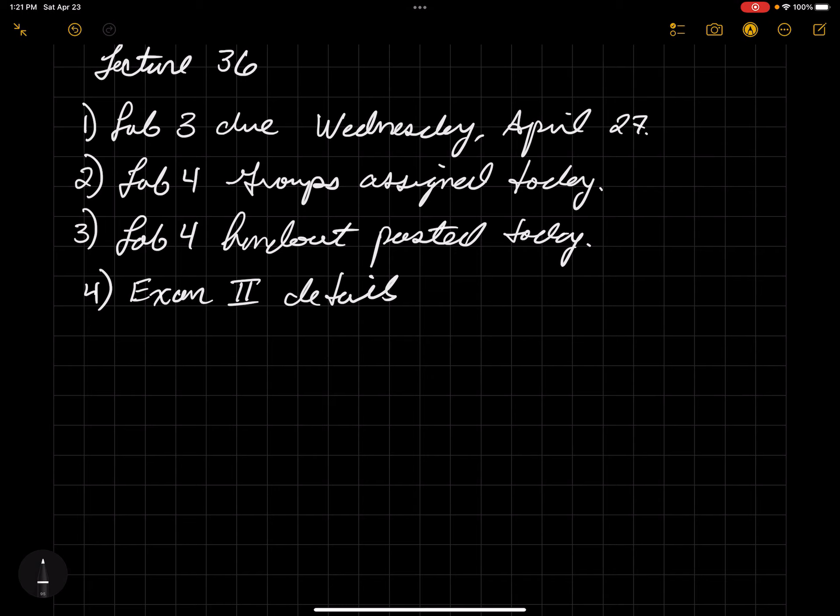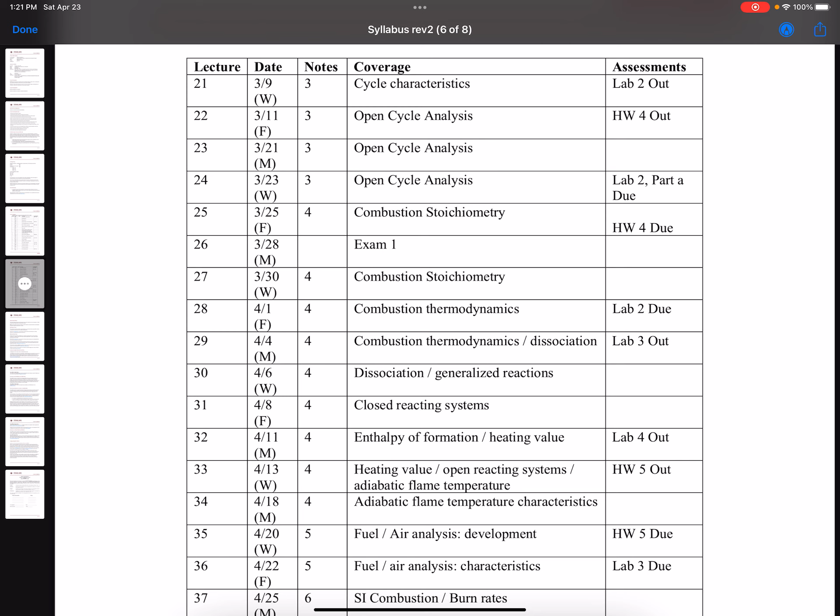I also want to take a little bit of time to talk about the Exam 2 details. We've already talked about this a little bit in one of the lectures this past week, but just to give you a review of where we are with the rest of the semester. So we're essentially right here with lecture number 36.

Lab 3 has been pushed to a due date of Wednesday, April 27th, and that's been updated on the calendar. We're about a lecture behind schedule, where we'll be wrapping up the flame temperature characteristics today. We'll be starting and probably finishing the fuel air cycle analysis development today, and then probably covering the fuel air cycle analysis characteristics on Monday. This will then allow you to do all of Lab 3 - once we get through the fuel air cycle analysis characteristics, you'll be able to do objective number 2 of Lab number 3.

On Wednesday, we'll probably start our discussion about SI combustion and burn rates. This is what you will need to do for Lab number 4, as well as Exam 2. Exam 2 is basically covering much of the material we'll talk about in those 3 lectures about SI combustion and burn rates, plus some other cumulative type things we've discussed throughout the semester. I wouldn't be surprised if you're asked a question about power generation, or about nitric oxide formation, like what we'll be talking about here in just a minute as related to Lab number 3, or discussing things related to efficiency and such.

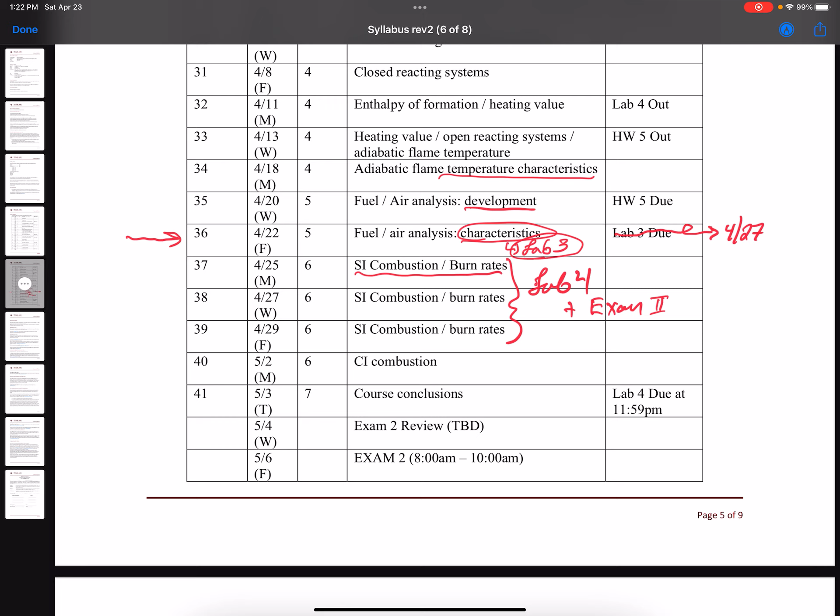Related to that, Exam 2 is scheduled for Friday, May 6th, and it's scheduled for 8 a.m. to 10 a.m. That's our scheduled final exam time slot.

As I've already mentioned in class, we'll be making Exam number 2 a take-home exam. I haven't quite yet decided on all the details, but it'll probably be released on Thursday, May 5th at noon, and then you'll have 24 hours to complete it, so it'll probably be due Friday, May 6th also at noon. Again, it'll only take you 2 hours to write it, but you have the 24 hours to work around schedules and other things of that nature.

These are still tentative at this point. This could change, but that's currently what I'm thinking.

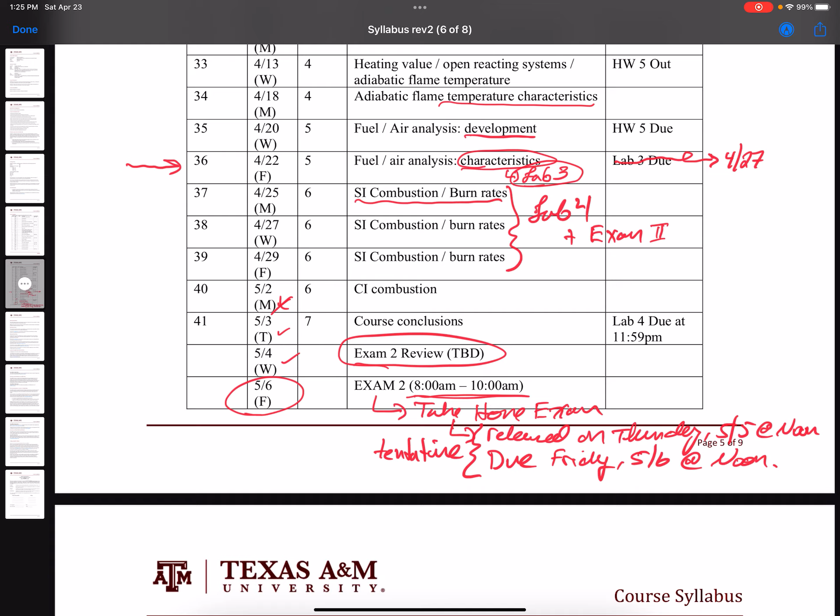Okay, so let's continue on with the lecture material and wrap up our discussion about adiabatic flame temperature. If you remember, when we last had class in person, we generated a figure that looks something like this, where we have adiabatic flame temperature as a function of phi, the equivalence ratio, on the x-axis.

So this is our equivalence ratio. As you can see, generally speaking, our adiabatic flame temperature tends to increase on the lean side, reaches a peak, and then begins to decrease as we go to a richer mixture. I won't go over those details since we covered that in the previous lecture. We also talked about how increasing the exhaust gas recirculation level, the EGR level, will cause a lowering of the flame temperature.

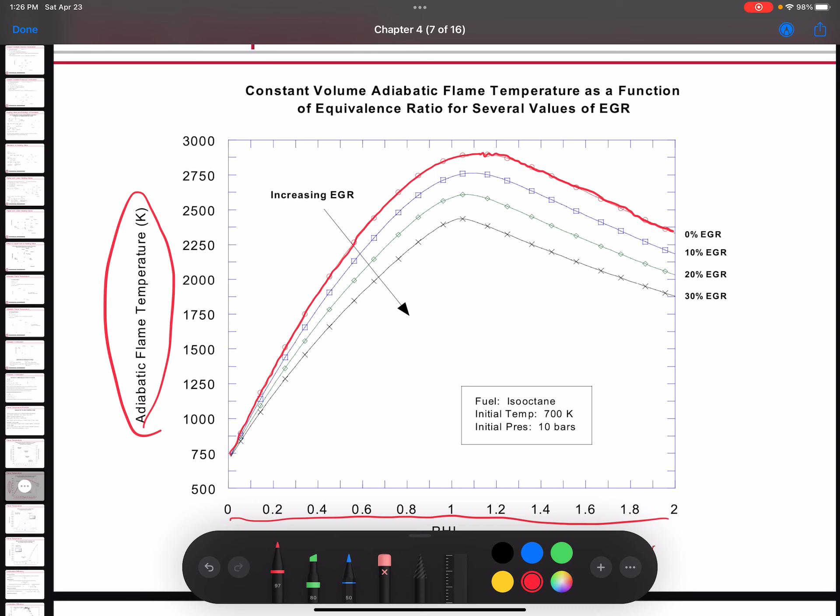If you remember, we discussed that the reason for this lowering of flame temperature as EGR increases is that we're essentially diluting the mixture with mass that has to be raised to the reaction temperature, but doesn't actually provide its own energy to the reaction. So it's conceptually similar to leaning the mixture with diluted air. As you go to lean equivalence ratios, increasing the EGR level is more or less doing the same thing. But the difference is that rather than using pure air to dilute your mixture at lean equivalence ratios, you're using exhaust gases.

So you have increased concentrations of CO2 and water in your mixture, and as a result, that causes your peak flame temperature to shift closer to stoichiometric. If you look at where that peak flame temperature occurs, you'll notice the peak is shifting closer and closer to the phi equal to 1 equivalence ratio, stoichiometric conditions.

One of the chief reasons why that happens is because, as we raise the equivalence ratio up to stoichiometric conditions, the adiabatic flame temperature continues to increase since we're decreasing the concentration of O2 in our products of combustion. As that O2 concentration decreases, the mixture reaches a higher temperature because there's less mass there to absorb the energy.

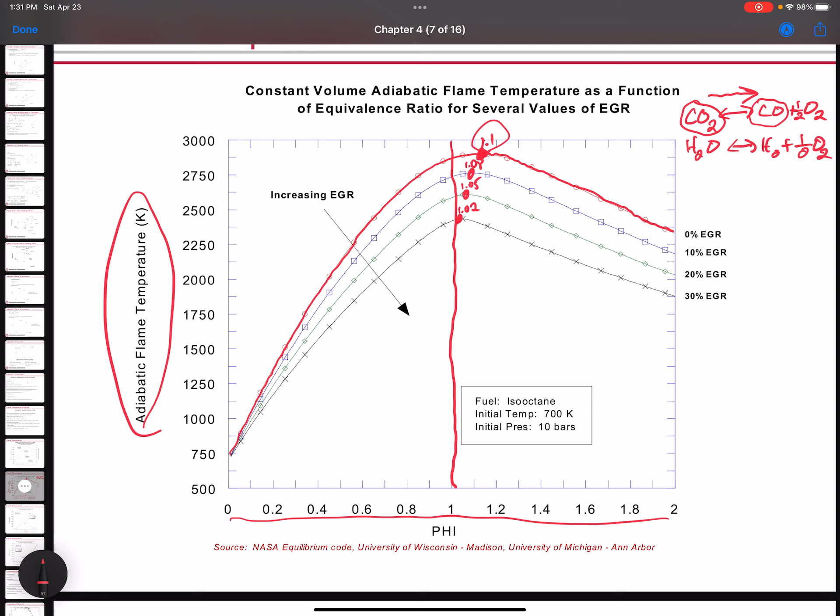As we go to higher and higher flame temperatures, this dissociation reaction is pushed in the forward direction. As you go to higher flame temperatures, your carbon monoxide concentration increases, as well as your oxygen concentration. CO absorbs less energy than CO2 does — in other words, CO2, being a more complex molecule, is able to absorb more energy within the molecule itself than CO or oxygen is able to absorb. Likewise, water is a complex molecule, and as you raise its temperature, the water dissociates into H2 and O2.

As we go to higher and higher flame temperatures, as the equivalence ratio increases, there's a dissociation of H2O into H2 and oxygen, and these two species hold less energy at a given temperature than water does. Because these molecules hold less energy, that energy has to go somewhere, so it raises the kinetic energy of the whole mixture, which raises the temperature of the mixture.

This peak flame temperature occurs essentially where there's a balance between the dissociation of CO2 and water into their component species of CO, hydrogen, and oxygen, and the addition of higher amounts of mass within the mixture. So eventually the temperature begins to decrease as there's an overabundance of, say, CO or hydrogen atoms within the products of combustion.

So what causes this shift as EGR level increases is the dissociation, right? The extent of dissociation of CO2 and H2O into component species - that would be things like CO and H2 - decreases as temperature decreases. In other words, equilibrium is being shifted toward the reactants.

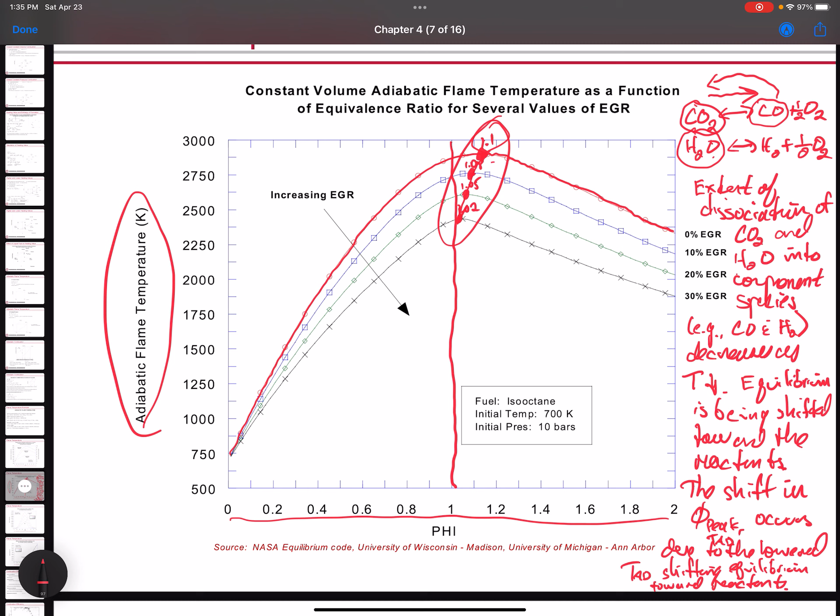Now what I'm going to do is jump ahead two slides and go to the relationship of mole fraction of carbon monoxide as a function of equivalence ratio. As you'll notice, and as might be expected, as we increase our equivalence ratio starting from a lean condition, say for a 0% EGR case, the carbon monoxide concentration begins to increase, rather drastically as we go to richer and richer conditions.

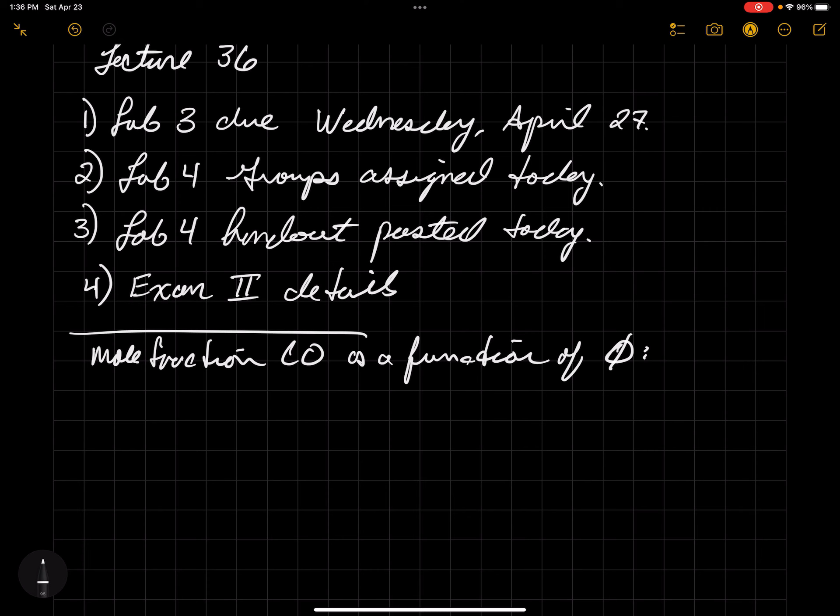So we can essentially argue, for the relationship of mole fraction of CO as a function of equivalence ratio, what do we have going on here? The first observation we see is that CO concentration begins to rise lean of stoichiometric. Notice, for example, we have a non-zero concentration of CO at an equivalence ratio of 0.8.

So what happens is as temperature, as T adiabatic, increases from a lean condition, dissociation of CO2 and H2O into their component species - that is CO, H2, and O2 - occurs more fervently. In other words, another way of saying that is that equilibrium shifts to the products as temperature increases.

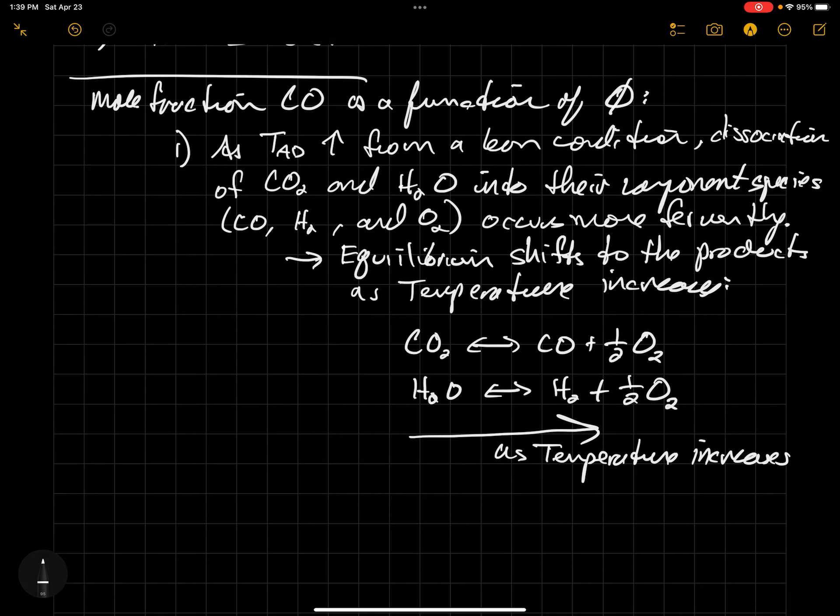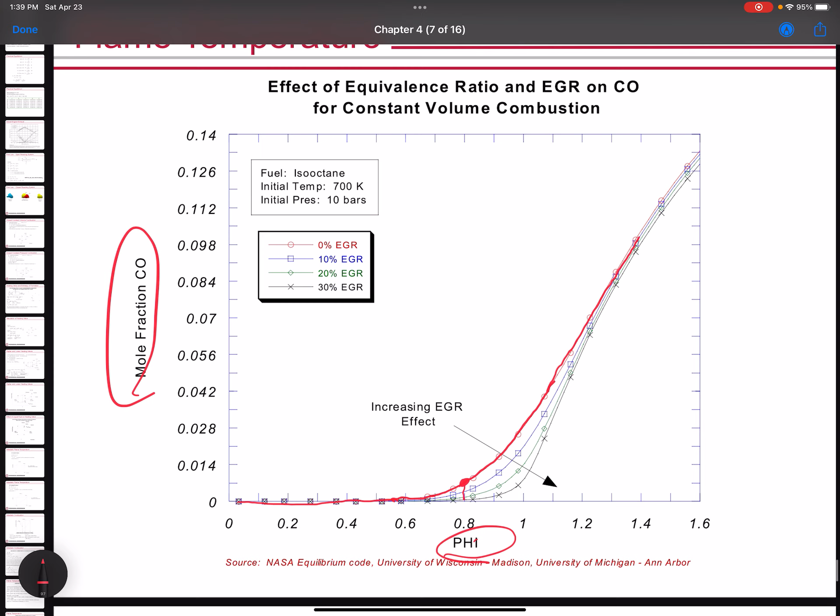So what's basically happening is you begin to see these initial increases in carbon monoxide, even for lean conditions like 0.6 and 0.8, because the flame temperature is high enough to cause that dissociation of CO2 into CO, for example. But then how do we explain why carbon monoxide fraction continues to increase?

So if I were to overlay on here the flame temperature behavior, what I would get is something that looks like the following. I'm going to mark on here where I would expect to see peak flame temperature. So adiabatic flame temperature essentially looks something like this - that's poorly drawn, let me see if I can do a better job with that.

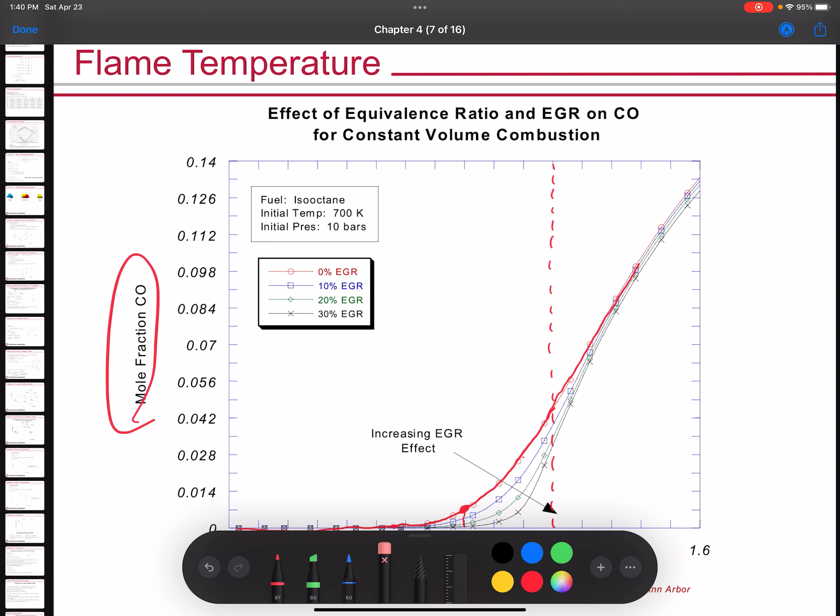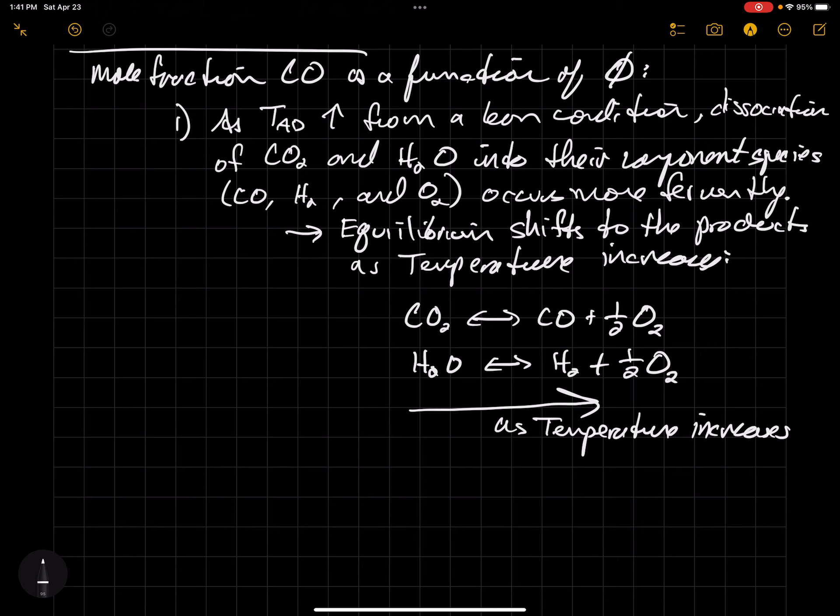So if we look at this region here, we might argue that CO increases certainly because temperature is increasing. But then how do we explain the continued rise in CO after we reach our peak adiabatic flame temperature? Our peak adiabatic flame temperature is occurring at 1.1. And if we accept that our CO concentration is increasing because increasing temperature has shifted equilibrium toward the products, then how do we explain the ever-increasing CO as we go to a richer and richer mixture, where now the flame temperature is decreasing?

Well, if you remember, when we first talked about equilibrium, we said there are three things that can affect the equilibrium composition of a mixture. The first one was temperature, and we've already addressed the temperature effect. The second one is pressure, but our pressure is basically staying the same here, so we can reasonably assume it stays about the same. So then the third item that can affect equilibrium is species concentration.

And that's what's causing this ever-increasing CO concentration as we go to richer and richer mixtures. So on the rich side of our peak adiabatic flame temperature, we have increasing species concentrations, causing the continued rise in CO, despite a decreasing temperature.

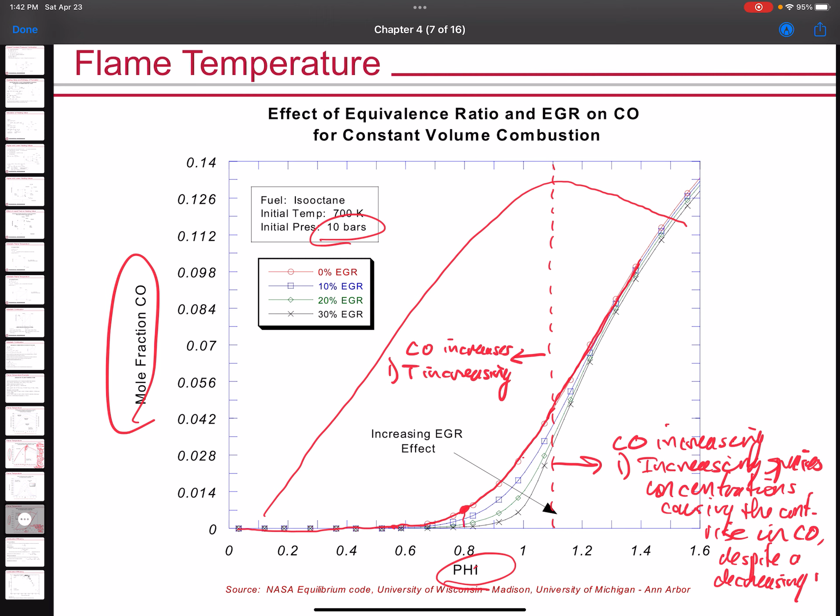You might be thinking, okay, what is that increase in species? Well, remember that our fuel is a hydrocarbon. So as we go to richer and richer mixtures, we're increasing the concentration of carbon in this equilibrium reaction. As we increase the fuel concentration, we're increasing the concentration of carbon. And as we add more and more carbon, if you have a mixture of CO2 with CO and oxygen, adding more carbon will tend to shift the reaction in the forward direction. That imbalance in carbon makes it more difficult to create fully oxidized carbon, fully oxidized CO2.

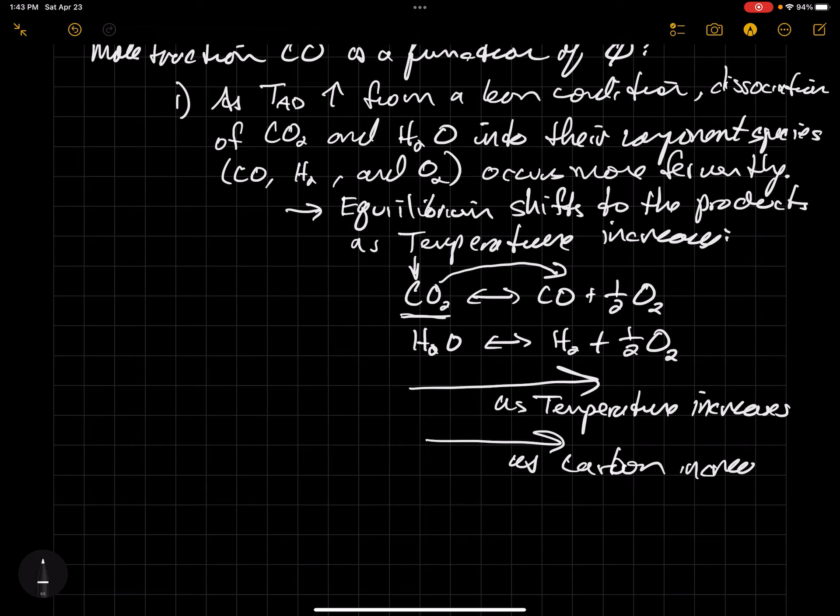And so by adding species to the mixture, by adding carbon, you're also shifting your equilibrium to the right. As carbon concentration increases, the equilibrium reaction will also be shifted toward the products. So that allows you to explain the behavior of CO as a function of equivalence ratio.

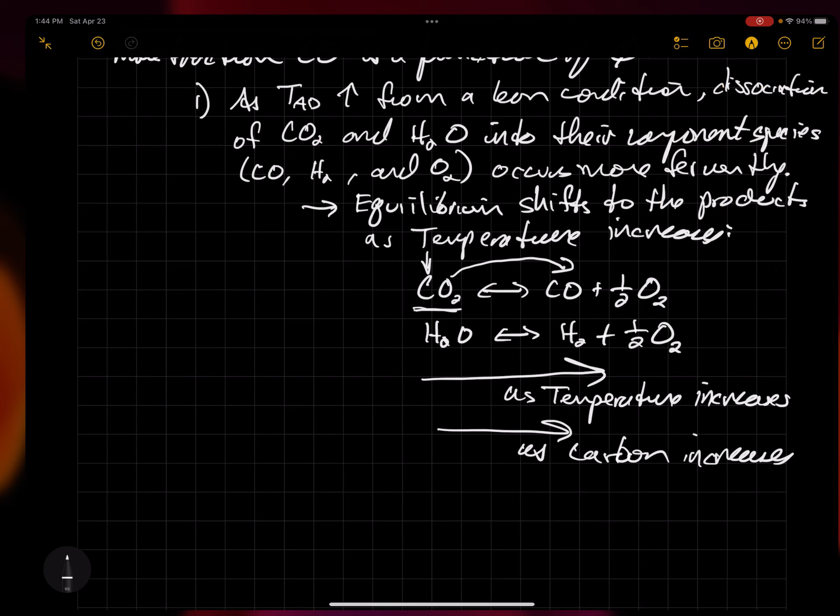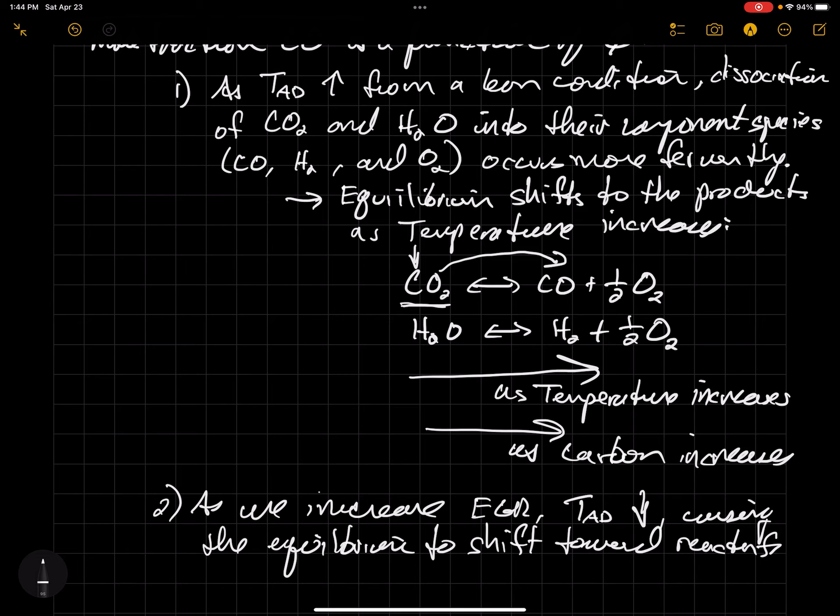So again, we have CO2 in equilibrium with CO and oxygen. And as we lower the temperature, that's going to cause the reaction to favor the reactants. So lowering of temperature favors the reactants.

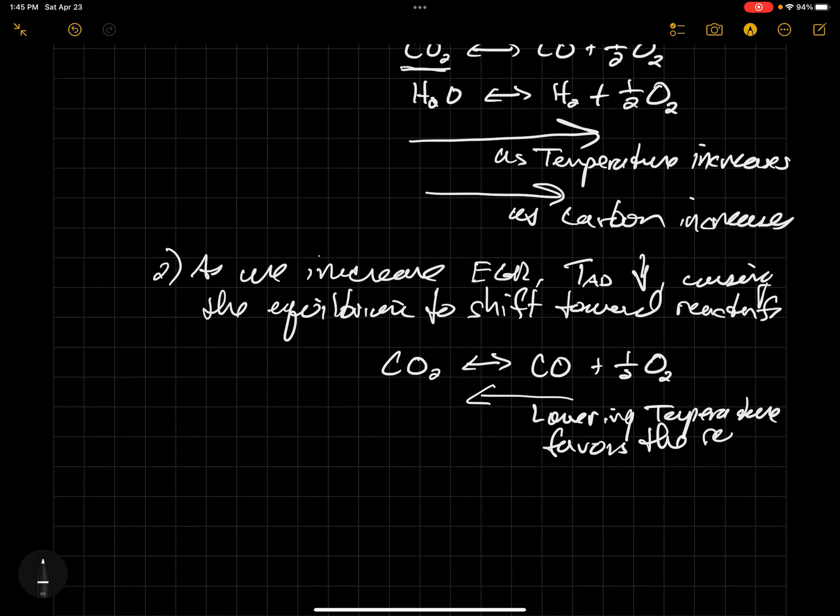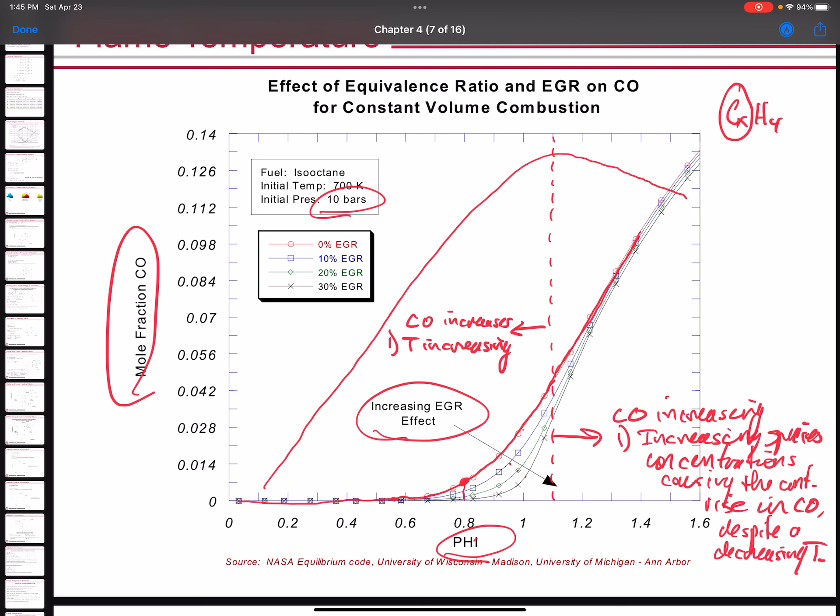Okay, so that pretty much addresses everything we need to discuss related to mole fraction of CO. So let's go ahead and talk now about one of the really interesting behaviors to study with adiabatic flame temperature, and that is the relationship of nitric oxide with equivalence ratio.

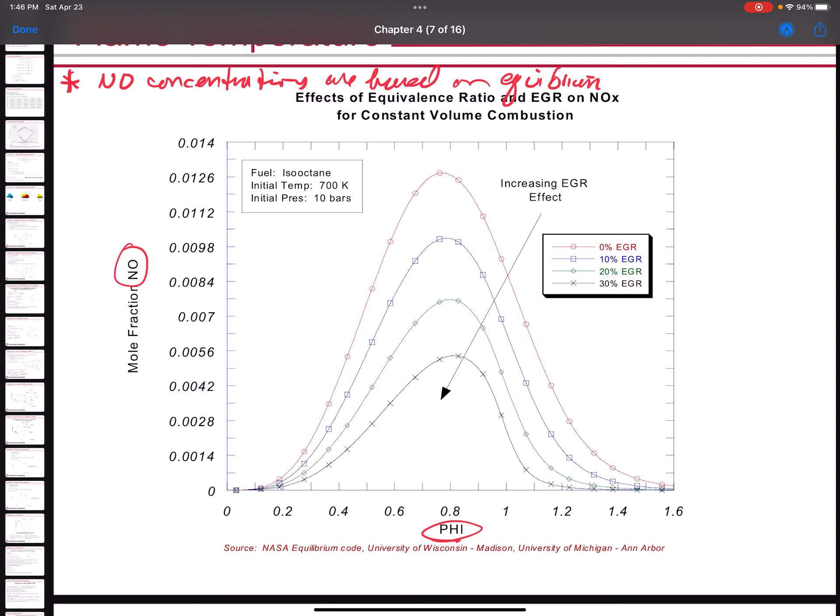So this is NO as a function of phi. Just as a technical disclaimer, recall that the mole fractions of NO, the NO concentrations, are equilibrium concentrations—not kinetic reactions.

An equilibrium reaction is a purely thermodynamic chemical reaction where we go from one state to another, and the reactants and products are allowed to achieve their equilibrium states at both states. Kinetics, however, is a time-dependent relationship where you may or may not actually achieve equilibrium concentrations during a kinetic reaction—there may not be enough physical time for the kinetics to drive the reaction toward an equilibrium condition.

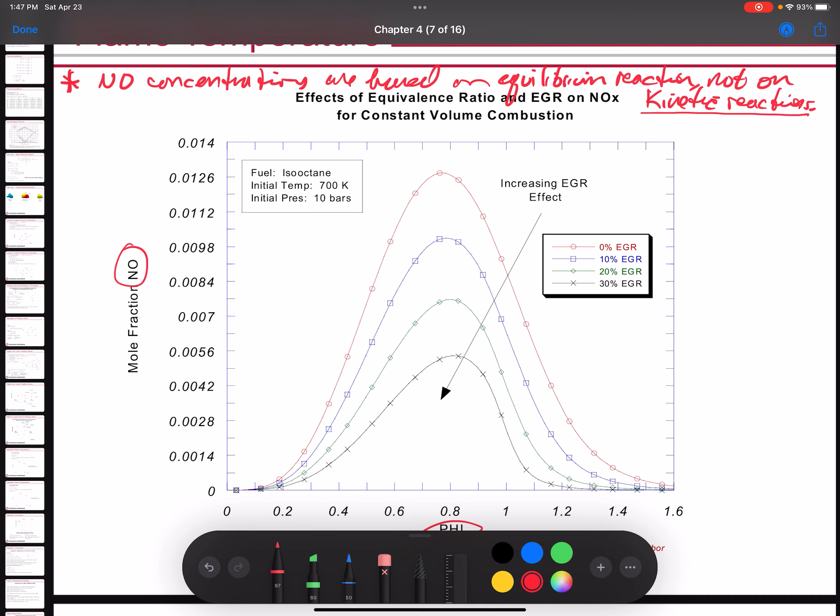So these NO concentrations that you see in this plot are all mole fraction nitric oxide equilibrium concentrations. It's rather interesting because you'll definitely see similar behavior if we were to repeat these calculations using kinetics—at least for engine applications, we would see very similar relationships, which I'll talk about in just a moment. But I want to make sure everyone understands these are, in fact, equilibrium concentrations, not kinetic concentrations.

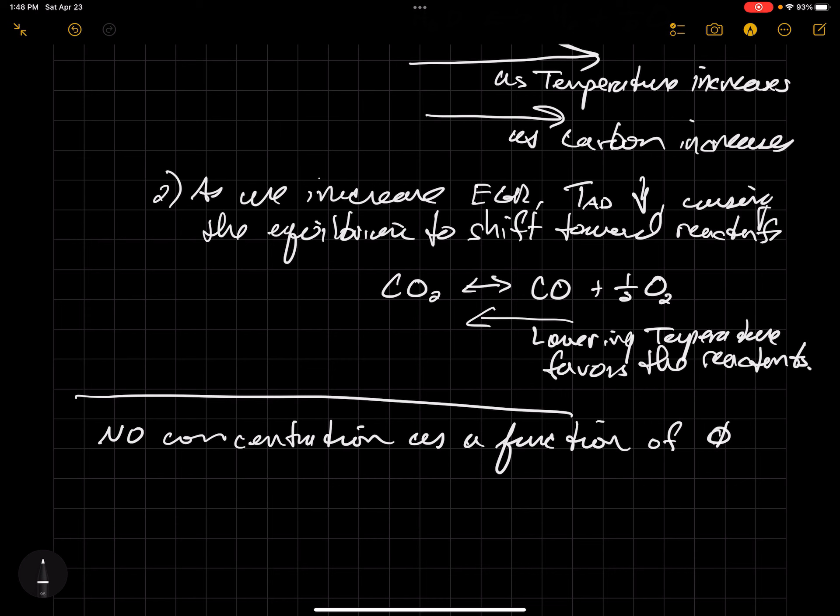One of the first things you'll notice is this is our stoichiometric equivalence ratio. Notice that the peak NO concentration is occurring very lean of stoichiometric. Let's talk about that to understand what's going on. It really comes back to the three principles that drive equilibrium. So if we now look at the NO concentration as a function of equivalence ratio, we're basically getting a relationship that looks something like this.

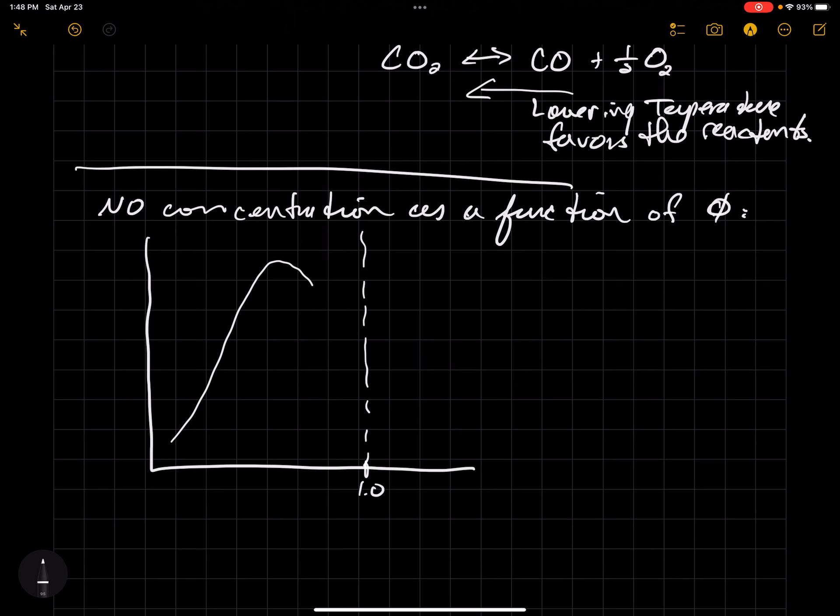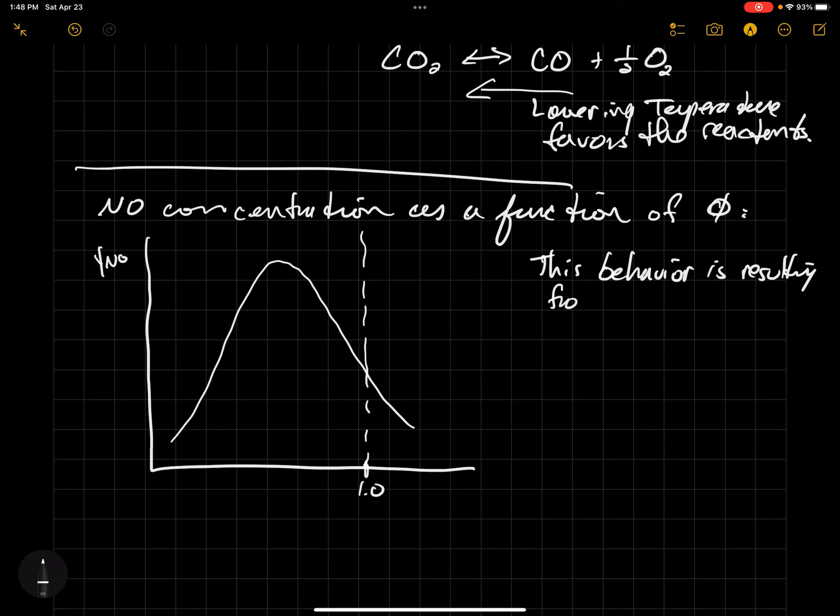This is NO concentration, Y_NO. This behavior is resulting from two competing contributors.

Of NO formation, you'll remember from class that nitric oxide has a very strong dependency on temperature. So that's the first competing contributor.

The second competing contributor is species. Remember that two of the three conditions that'll shift the equilibrium of species are temperature and species. So the reason we're seeing this behavior with NO is due to competition between the temperature of the mixture causing dissociation of N2 and O2 into nitric oxide, and secondly, the species.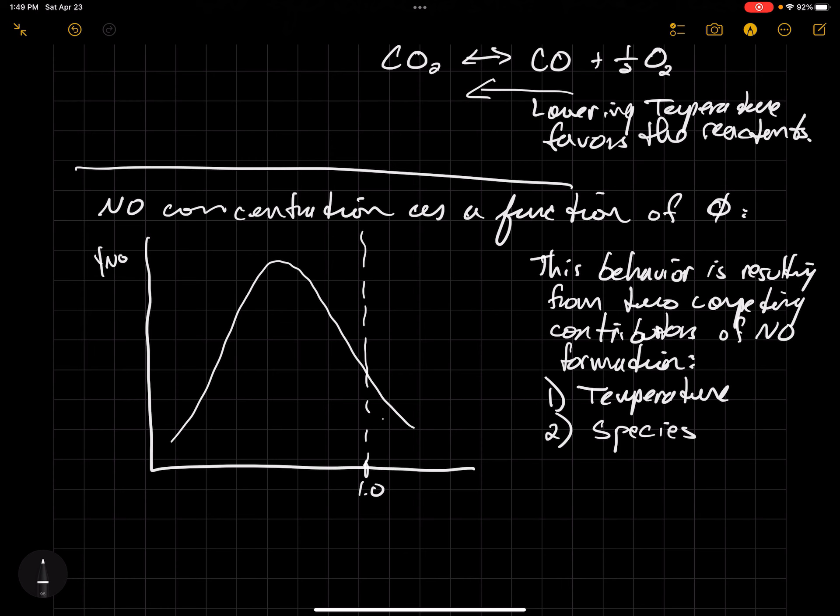Let me write out what that equilibrium reaction is. Our reactants in this case would be 1/2 N2 plus 1/2 O2, and this is in equilibrium with NO.

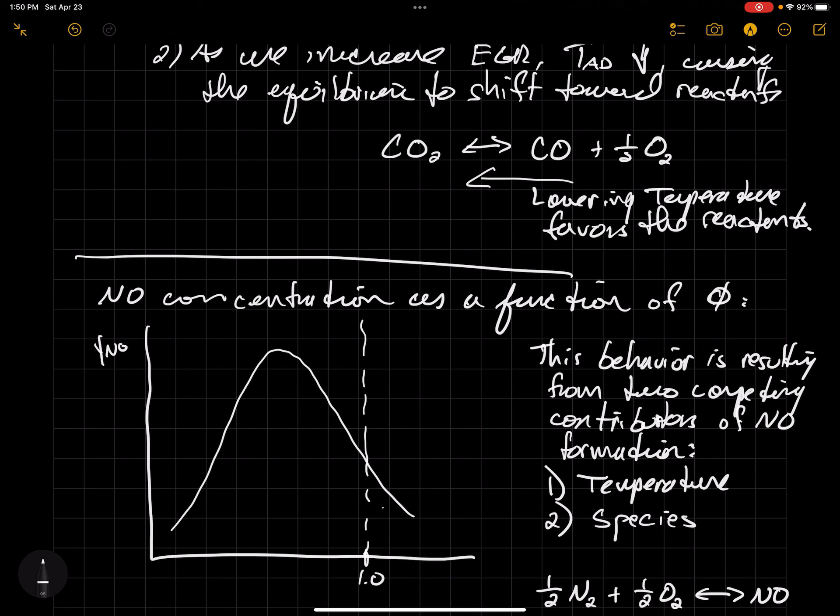You might be wondering why I wrote N2 and O2 as the reactants and NO as the product, whereas before when we did carbon dioxide, I had CO2 as the reactant and carbon monoxide and O2 as the products. The reason is that CO2 in equilibrium with CO and 1/2 oxygen is such that as you add energy to CO2, it'll dissociate into CO and 1/2 oxygen.

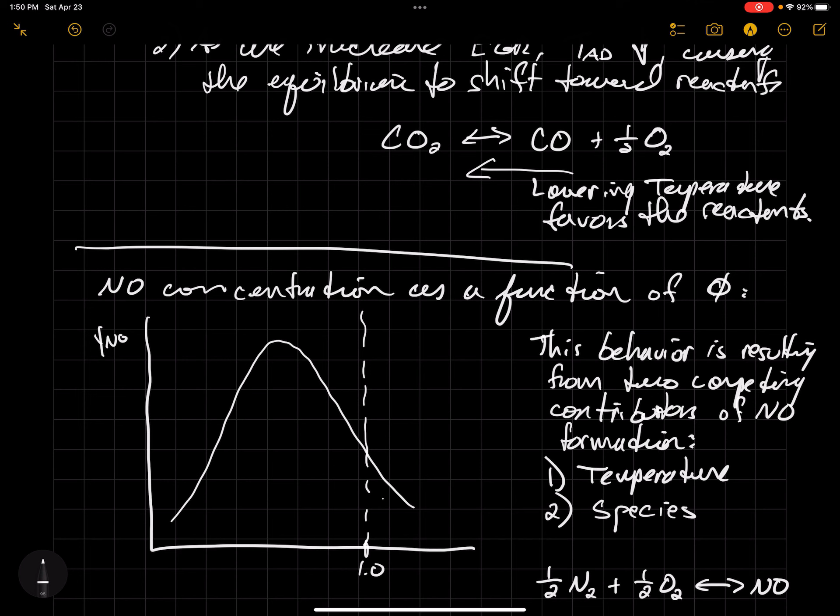Whereas as you add energy to N2 and O2, it'll dissociate and form NO. This is why we generally write it this way.

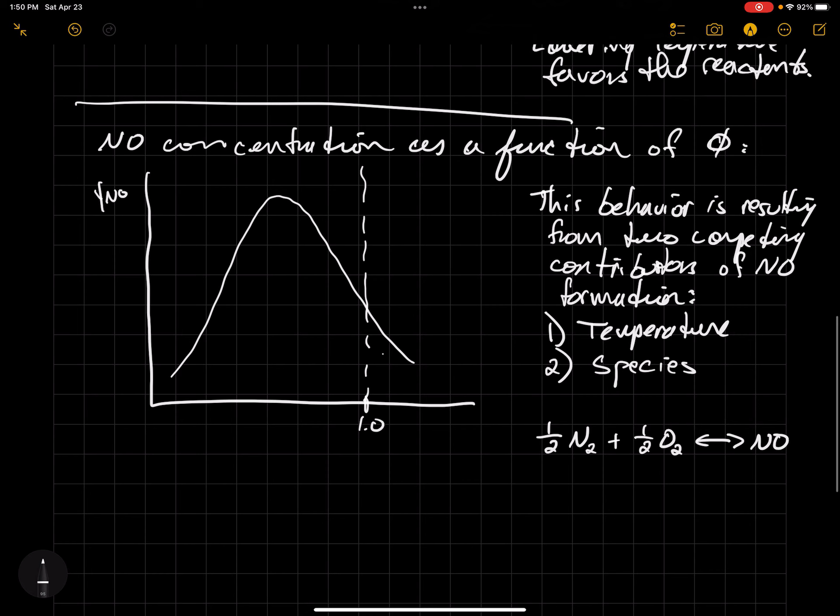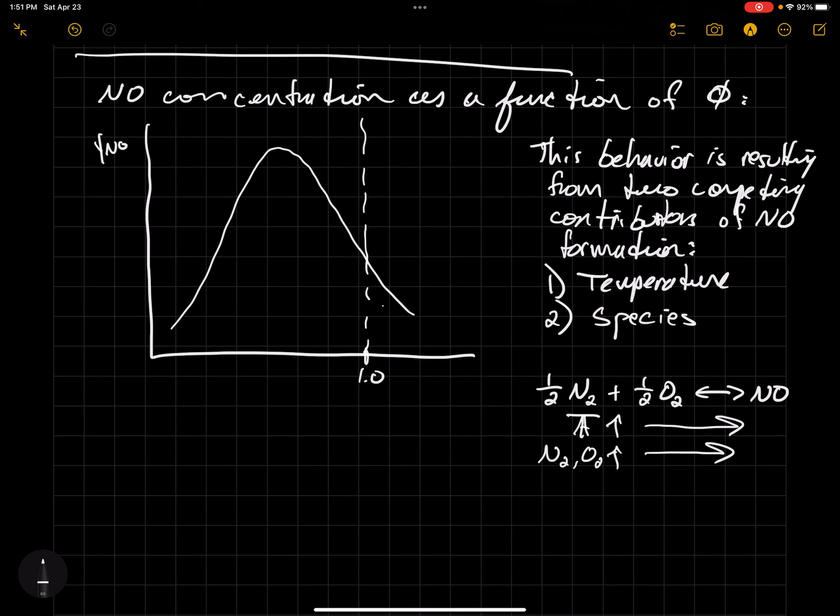Another way to think about it: if we want the temperature effect to be in the same direction, as temperature increases, we're going to shift equilibrium to the right. But likewise, as we add concentrations of N2 or O2, we will also shift the reaction to the right. This is where there's a competition, because when we're at lean conditions...

If I go ahead and draw this as a function of equivalence ratio, suppose this is the adiabatic flame temperature, and suppose this is the mole fraction of N2 and mole fraction of O2—their relationship is basically the same. So our adiabatic flame temperature would look something like this.

So this is T adiabatic, off of the T adiabatic scale. But then if I plot the mole fraction of N2 and O2, that's going to look something like this—either the mole fraction of N2 or O2, using the second y-axis.

Essentially what you see is that at very lean conditions, I have plenty of nitrogen and oxygen, but I don't have a high enough temperature to dissociate them so they can form NO. Then as I go to stoichiometric conditions, I have a high enough temperature to dissociate N2 and O2 into NO, but I don't have any N2 or O2 left to dissociate into nitric oxide.

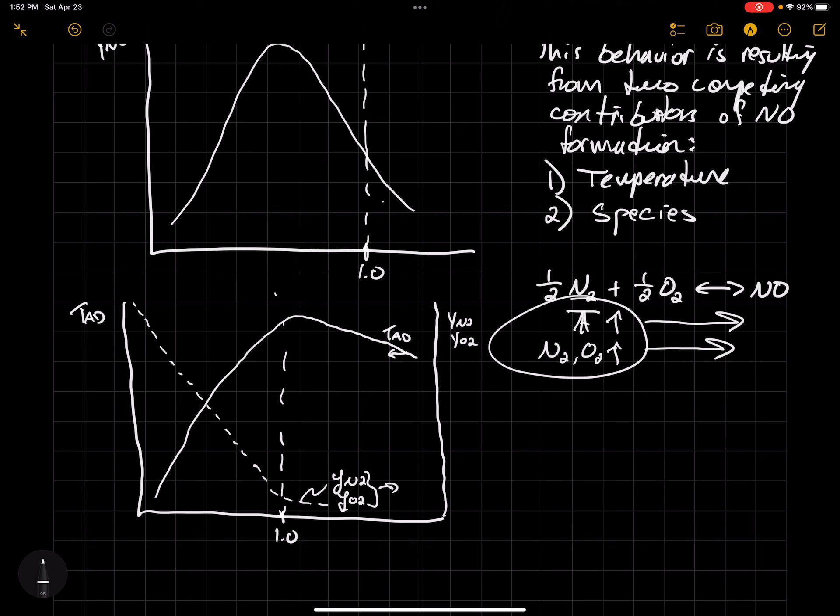So where this peak occurs is basically where there's a trade-off between having enough species and having enough temperature. If I'm lean of this point, I have enough species but not enough temperature. And if I'm rich of this point, I have enough temperature but not enough species.

My peak nitric oxide concentration occurs where that trade-off is balanced—where that equilibrium is formed, where as I raise temperature, I'm shifting my equilibrium in this direction, but I'm decreasing my concentrations of N2 and O2, which has the tendency to shift the reaction back toward the reactants. This is essentially what happens as phi increases with our nitric oxide as a function of phi relationship.

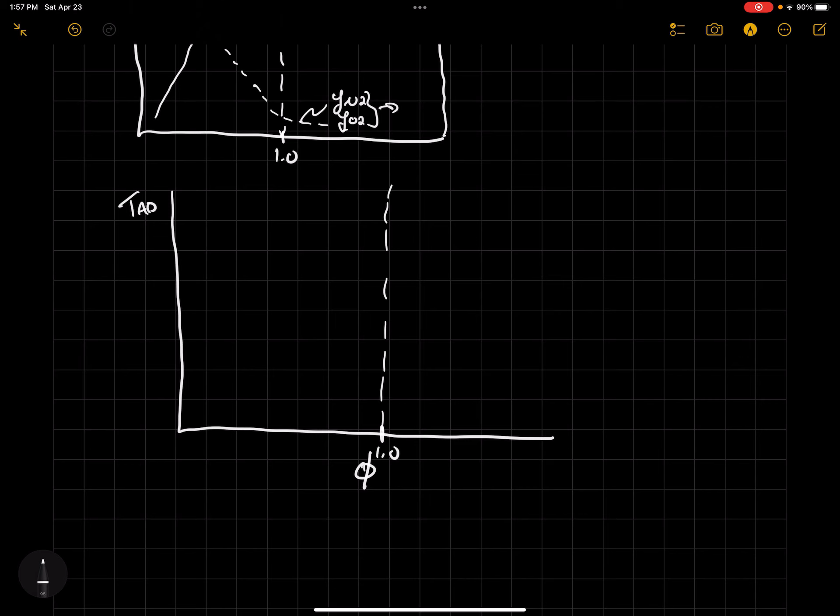Let me explain what I mean by looking at the notes. So if we look at adiabatic flame temperature versus phi, suppose this is 1.0 here. This is our adiabatic flame temperature for a given EGR, say 0% EGR. And then this is the adiabatic flame temperature for, say, 20% EGR.

Let's suppose you start having fervent NO production at this flame temperature here. This is the adiabatic flame temperature where there's noticeable NO formation. When you increase the EGR level, that temperature shifts to the right, closer to stoichiometric, because the EGR is causing an overall lowering of the flame temperature. So shifting that point at which you reach this absolute temperature at which the equilibrium starts to really kick in.

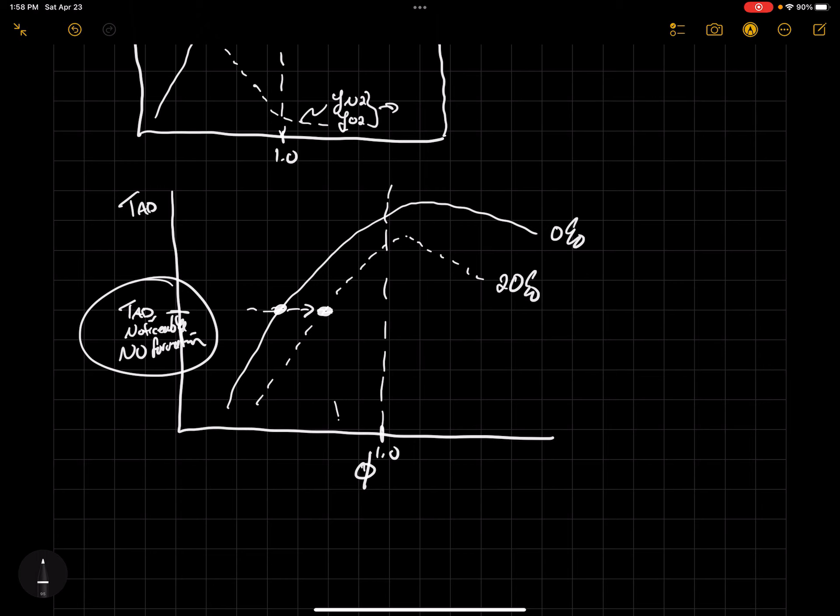That dissociation effect really starts to kick in, and the equivalence ratio at which that temperature occurs shifts closer to stoichiometric. So that's basically what you're seeing as we go to higher and higher EGR levels - that peak NO concentration is shifting towards stoichiometric because that's the equivalence ratio where the temperature is high enough to result in fervent dissociation of N2 and O2 into nitric oxide.

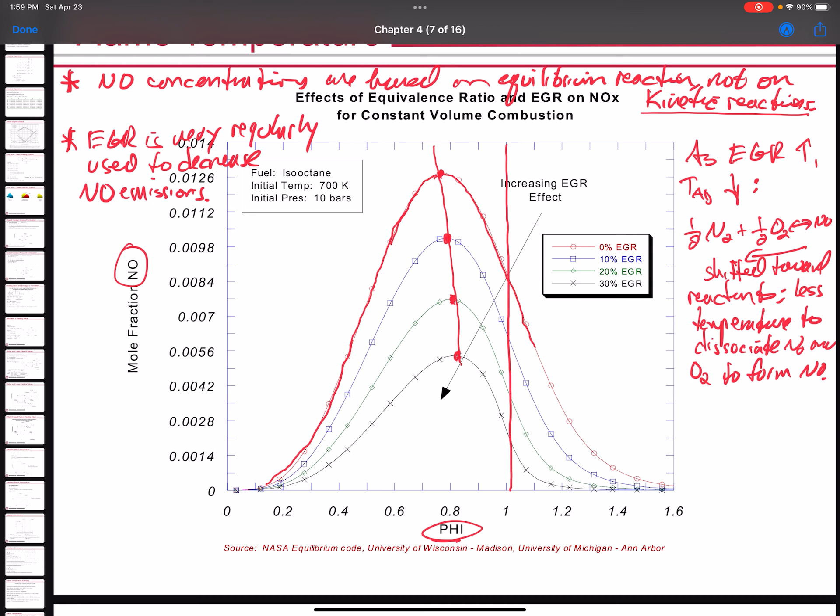Okay, very good. So you're now able to completely write objective number 1 of Lab 3. We'll now start to shift gears to focusing on objective number 2 of Lab 3, and also begin our discussion of the Chapter 5 material, the fuel air cycle analysis material.

One of the first things we'll do, still part of the Chapter 4 notes, is go back and define these efficiency terms we had already used, but now relate them to something we can actually calculate in the model. Remember that fuel conversion efficiency is defined as the work per cycle - this WC is the work per cycle, not just the compression work - divided by the energy delivered. Remember that mass of fuel times heating value is the energy that's delivered.

But not all of the energy that's delivered will react. In other words, not all of the energy delivered will be released. There can be a combustion inefficiency - a fraction of the delivered fuel that doesn't even combust, doesn't even oxidize. Now that we can do rich combustion reactions, we know there's going to be a fraction of fuel provided in the mixture whose energy never gets released. That's what combustion efficiency is describing - how much of this delivered energy actually burns during the combustion process.

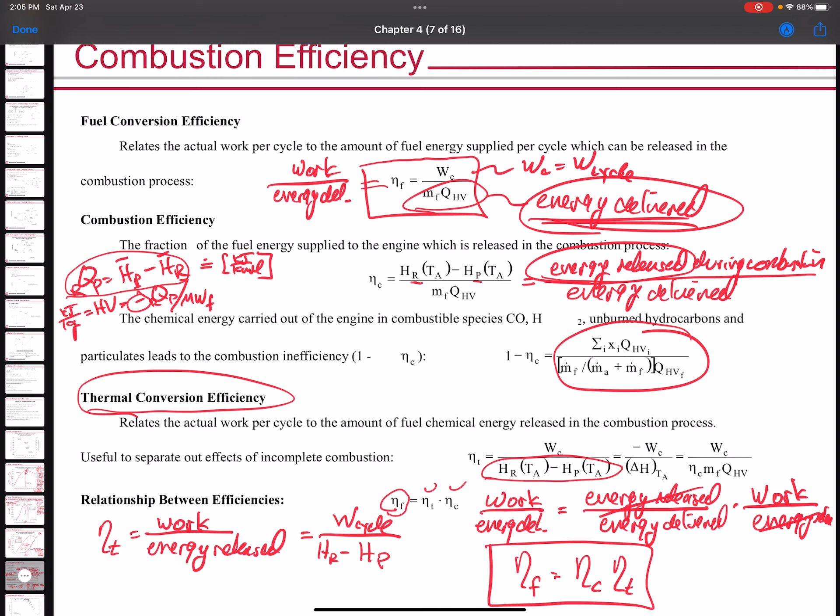What's interesting is that now that we're able to quantify combustion efficiency as the enthalpy of the reactants minus the enthalpy of the products, using this expression to determine that enthalpy difference, or at least one minus that, we're able to plot combustion efficiency as a function of equivalence ratio, right?

This is data taken a long time ago by Dr. Heywood at MIT - a fairly old set of data, but interesting to note that when you go to very lean conditions, on this side of stoichiometric, our diesel engine data points, the X's, they all generally stay pretty high - combustion efficiencies of say 95% and greater, except for a few at very lean conditions where there might be some misfiring issues, but still generally above 90%, okay?

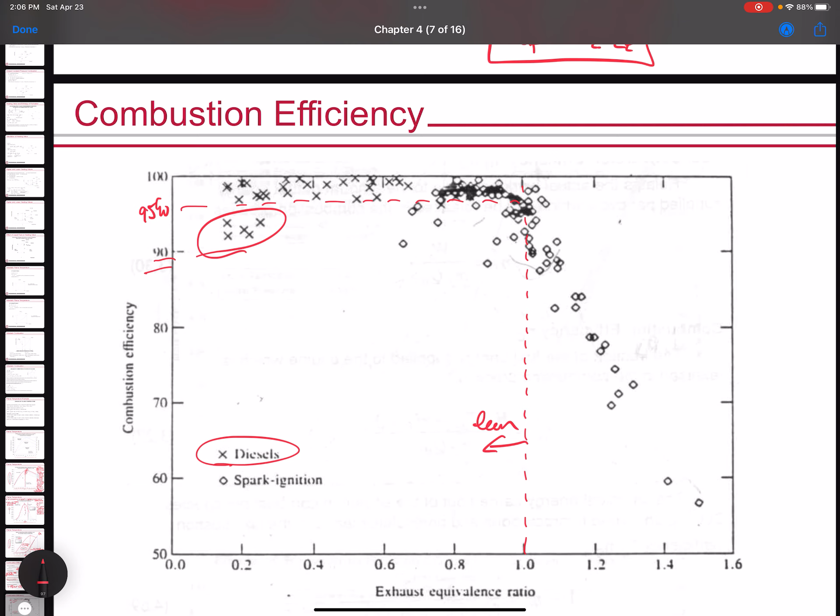Of course, diesel engines don't operate close to stoichiometric, so you'll notice this is one of the last data points where equivalence ratio is about 0.6 or so. That's about as rich as you can often get with a diesel engine.

A lot of this data scattered up here is all spark ignition engine data lumped together. Notice what happens as you go to very rich conditions - combustion efficiency decreases precipitously as you go to richer and richer conditions, right? So generally speaking, combustion efficiency as a function of equivalence ratio, where this is equal to 1.0, more or less looks something like this, okay?

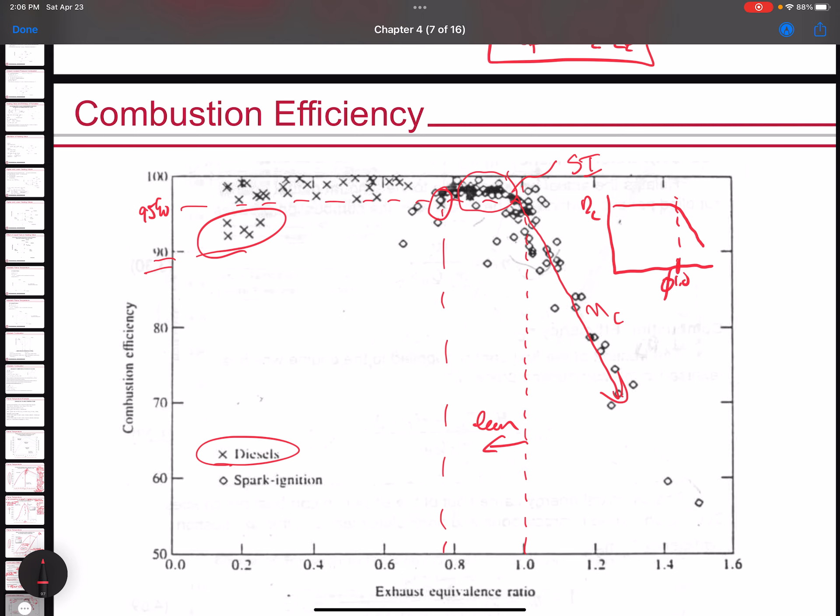We're going to come back to that concept here in a little bit as we start our Chapter 5 analysis, fuel air cycle analysis, and consequently do these calculations. All right, well, that completes Chapter 4 for us.

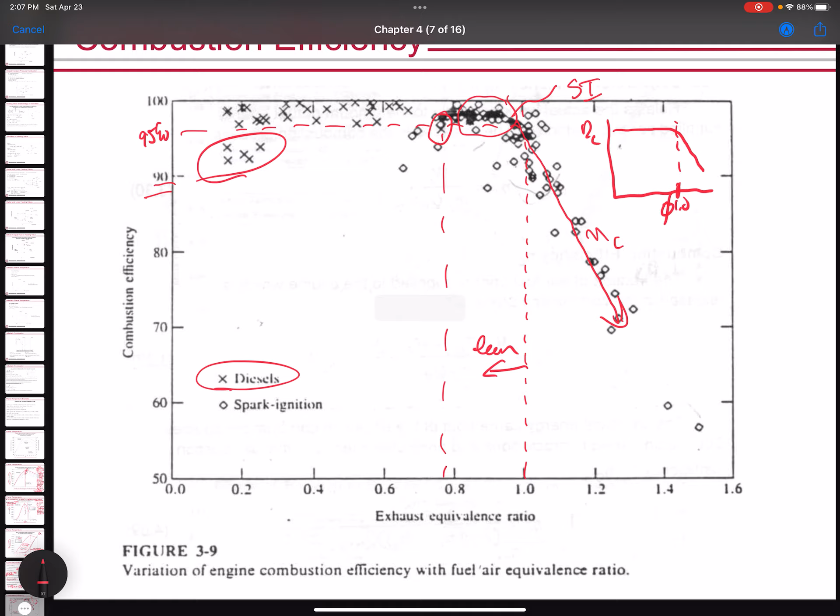So let's go ahead and start to dive into Chapter 5, which is now the combination, the thing we've been building up to for literally the last 8 weeks or so, right? If you remember, we did heat engine analysis where we assumed ideal air model behavior - an open system, basically ideal air heat engine analysis. Then we learned a lot about combustion, where we actually have a fuel and air mixture, okay? When we do ideal air analysis, we basically assume constant properties of the mixture.

But we can't possibly do that for fuel air analysis because the mixture is changing, right? As the mixture undergoes reaction from reactants to products, it's not possible for us to assume constant properties. So we have to address the fact that the mixture is physically changing, chemically changing from reactants to products.

And that forces us now to capture those changing properties. That's essentially what we do when we do things like enthalpy of formation plus sensible enthalpy to characterize the thermodynamic properties of the mixture. So we take this heat engine analysis, we take this information about combustion, we add them together, and what we get is what we call fuel air analysis.

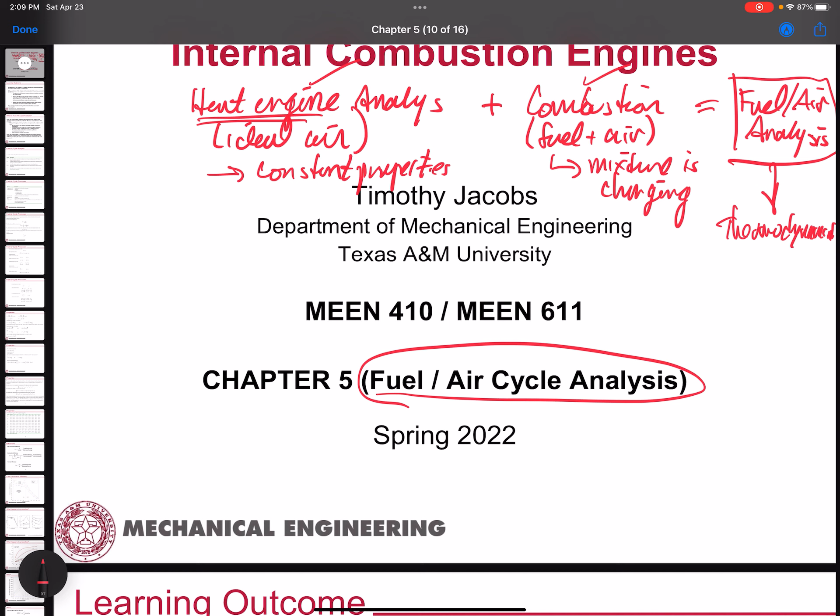Fuel air analysis resolves that last deficiency that we had when we did the heat engine analysis. Remember, heat engines are not IC engines, and IC engines are not heat engines. So we're getting ourselves to the fuel air cycle analysis, where we can have a thermodynamically correct representation of an IC engine. The fuel air cycle analysis is a thermodynamically correct IC engine analysis.

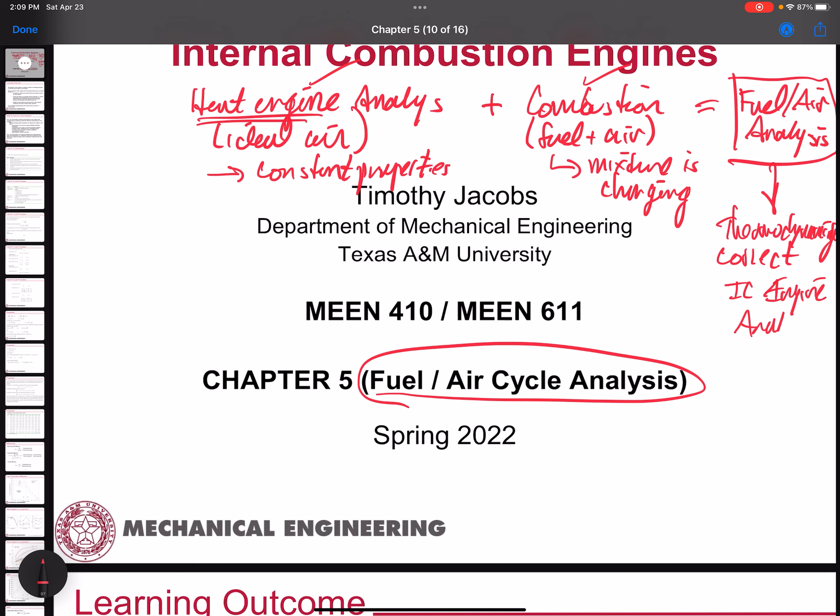Because of that, a lot of what we assumed before when we did heat engine analysis—some of the assumptions we made, maybe not in great detail at the time—one of the major assumptions from heat engine analysis was that the properties of the mixture do not change. We were able to assume constant specific heats, saying change in internal energy, delta U, is equal to CV delta T.

We can no longer do that when we do fuel air cycle analysis, because the mixture is changing as we go from reactants to products. That also means the properties of the mixture are changing. If the species are changing, that necessarily means the properties are changing. So we have to capture that.

The way we set this analysis up is going to look very similar to the heat engine cycle analysis we did in Chapter 3. But one big difference is that unlike the heat engine analysis, where we had a heat addition and a heat rejection process during the closed cycle analysis, we no longer have any processes that allow heat transfer. Our quote-unquote heat addition process, which doesn't exist in the fuel air cycle analysis, is actually an adiabatic combustion process. There is no external heat addition.

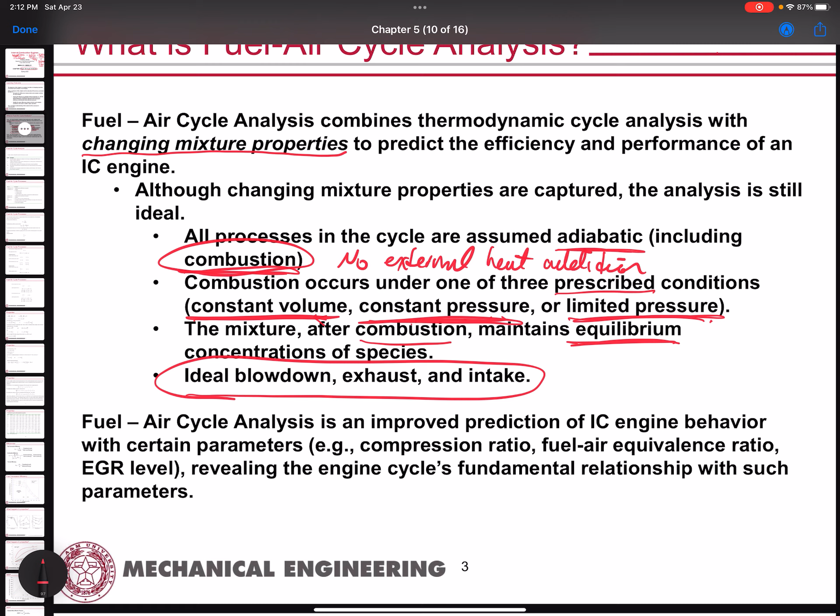We do allow the products of combustion to achieve and maintain equilibrium, including during the expansion process. And finally, the rest of the cycle is very similar to what we talked about in Chapter 3, the open cycle analysis, where we have an ideal blowdown process, the constant pressure exhaust displacement process, and then the constant pressure intake process.

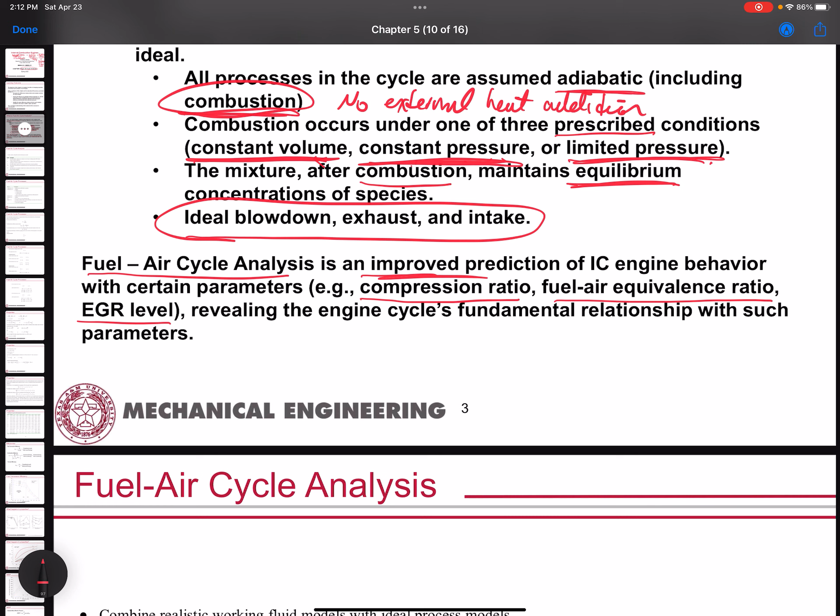Really, this fuel air cycle analysis is an improved prediction of actual IC engine behavior, where we can, for example, vary compression ratio, vary fuel air equivalence ratio, and vary EGR level. These are the things, for example, that you'll be looking at in objective number 2 of Lab 3.